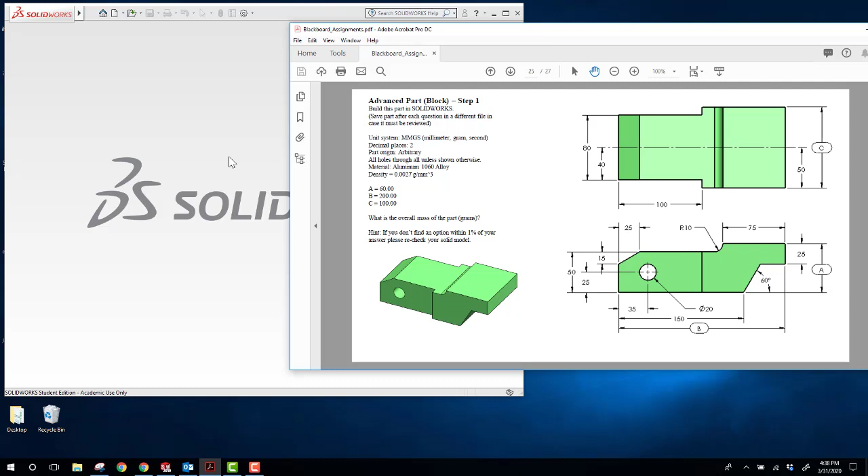The first thing I'm going to do is draw this profile. I need the values of A and B, which are going to be 60 and 200. There are a couple different ways of doing this. What I'm going to do is create a rectangle, and then I'll remove some of the material. We are in millimeters, so I'll create this in millimeters.

I'm going to create a sketch. If this is the view, this is the front view, and this is the top view. So I'm going to sketch on the front plane, and I'll go ahead and make a rectangle. So the B coordinate is 200. I'll come over here and get my Smart Dimension tool.

This will be 200. Now I would kind of put these in as actual equations, but if you look in the next two steps, these values don't change, so there's really no need for it.

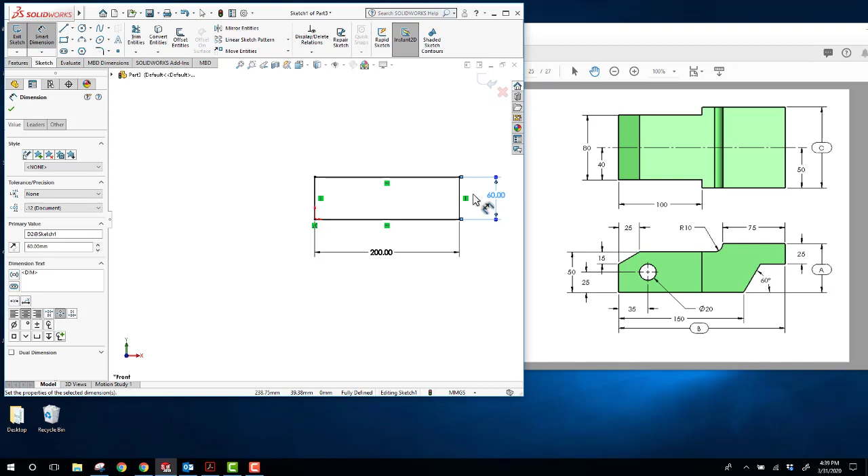Okay, so we have this little bit over here, so let's put this in with two lines. I'll come in here, come down, double click to end it, and get a dimension here of 60 degrees. And this dimension here should be 25. The distance from this point to the front of the part is 150. And that should lock that down.

Okay, so the next thing we need to do is this little bit out of here. The total height here is 50. So I'm going to not start at the midpoint, I'm just going to come up and create that little angle piece. I'll come over and go up, getting me the base shape. This distance here from this side to this is 25.

And this distance here is going to be 50. The distance here from this point to this point is going to be 15. And lastly, the distance from here to here will be 75.

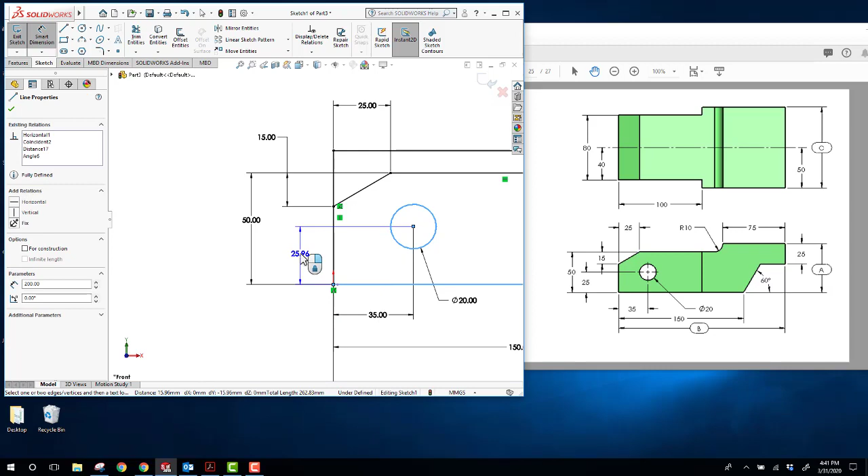So I'll come over here, zoom in a little bit, drop my circle, and the dimension is, the diameter of this is 20. I can click on the circle and the front line to give me the horizontal dimension, that is 35. And the dimension from the circle to the horizontal line here gives me a vertical distance of 25. The total extrusion distance is C, so that's 100.

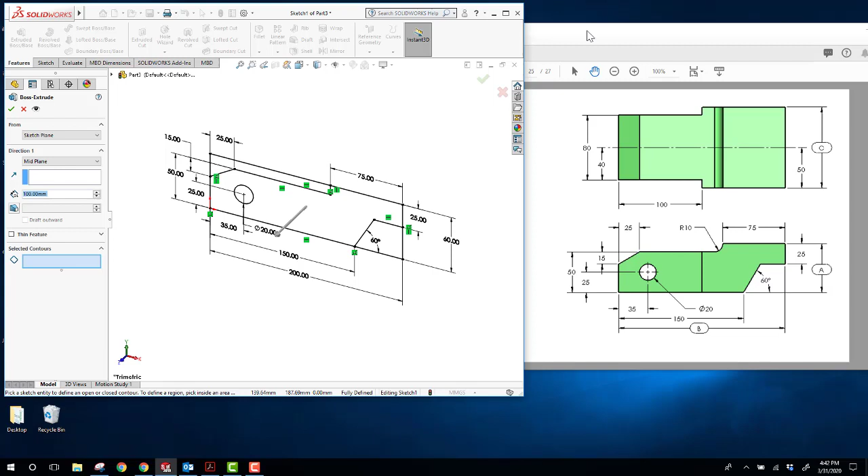So we'll go ahead and extrude this. We'll choose the Extrude button, Features, Extruded Boss. This part shows a mid-plane here, so it would make sense to do this as a mid-plane, so I'll do my extrusion as a mid-plane, and the thickness again is 100. I'll go back and double check that. It is, and now we need to select contours, so we'll come in here and select this internal contour, and we'll say that we're done.

So now we need to come in and put our radius in. We'll go Features, Fillet, using this edge. Oh, I didn't grab the fillet tool, so let's grab the fillet tool this time. And the radius is 10. The reason it showed up is I had that edge already pre-selected, and we'll accept that.

Now we have a little bit off the top here, so the total distance is 100. This is 80 being measured from the center line, so both of these are going to be 10 millimeter cutouts that are 100 millimeters long.

So what I'll do is go ahead and do a sketch on the top plane, and I'll just use my rectangle tool, and I'll do another rectangle on the top. Now I'll put some relations in here.

This relation, this side, and this line are going to be both collinear and equal to each other. And we'll accept that. Then this line and this line are both going up. I got a face instead, so let me clear those selections, and I'll select that line. Holding my control key down, I select this line, and these are also equal to each other.

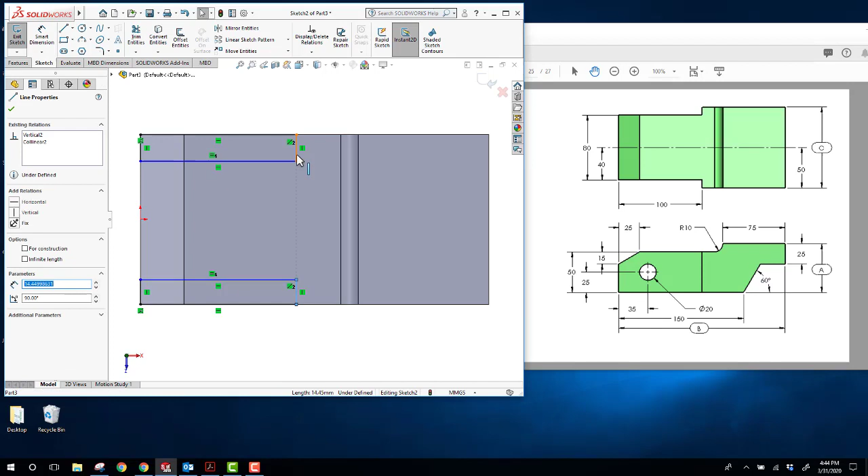Oh, I made that one parallel instead of equal. So let me delete that. Select it, I'll hit delete, and I'll go ahead and put this on, control key again, and make them equal to each other.

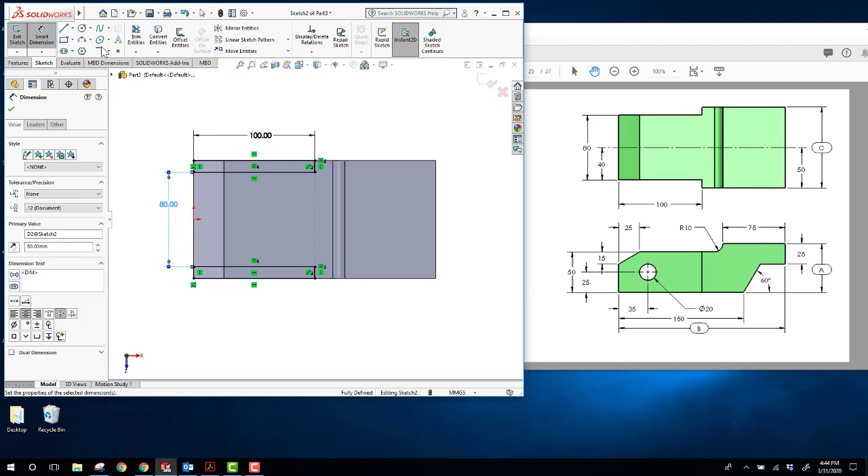All right, so now I just need to put dimensions on one of them. So this is 100. I could do this dimension if I don't want to measure anything, I can go from here to here and put the actual dimension they're calling out, which is 80.

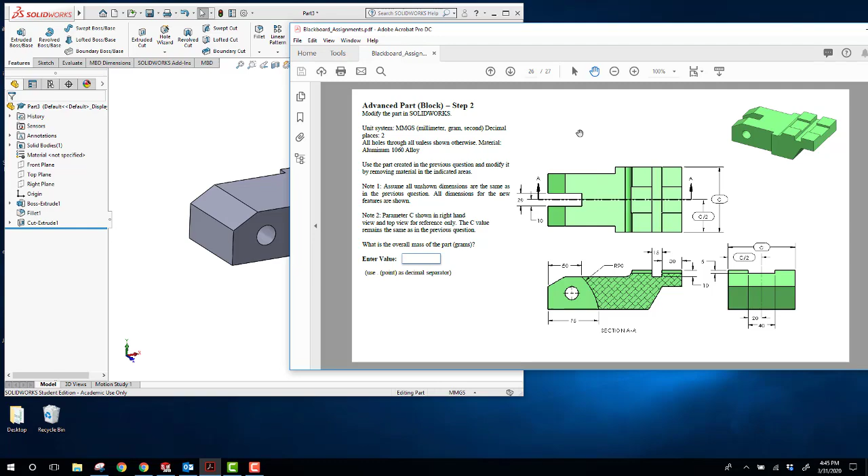This puts a couple of cutouts here. The cutouts on the top are pretty straightforward, but a lot of people are having issues with this one, so let's jump there first.

In this case, I'm going to make a sketch on the front plane. This is again why it was helpful to do that mid-plane extrusion. So I'll pre-select the front plane, and I'll say I'm going to do a sketch on that plane.

Now we see that we have a circle of radius 90, and they've given us the location of 2 points on that circle. So the location here is 50 and 75.

So I could create a whole circle, or I can just use the arc tool. So that's what I'll do. I'll do a 3-point arc, and I'll just select here, here, and then just drop the third point to define the radius somewhere. And we'll put the dimensions in.

So I'll use a smart dimension from the front to that point, and that becomes 50. And we'll go from here to here as well, and that'll be 75. And then since it's an arc, it'll ask me for the radius, so the radius is 90.

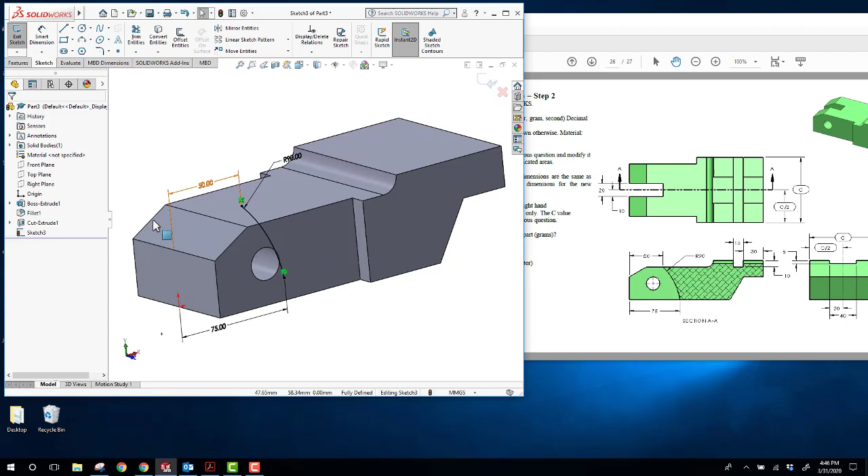And then to complete this, I need to actually get the rest of the area that we're going to use. So we'll just use the Convert Entities tool. Over here on the left, I'm going to click on normal to again, and I'm going to go Convert Entities, and I'll select this edge, this edge, this edge, and this edge again.

I'll say OK. And since these are converted entities, I can just go ahead and do my trim tool. So I'll use the trim tool and trim this one out and that one out. So we can look down that this sketch is fully defined, and I'll go ahead and do my extrusion.

So features and extruded cut. In this case, again, it's going to be an extruded cut from the midplane. Over here on the right, the total thickness there is 20. This 10 millimeter dimension is just telling you that this cut is centered. So my cut is 20 millimeters, and I'll say OK.

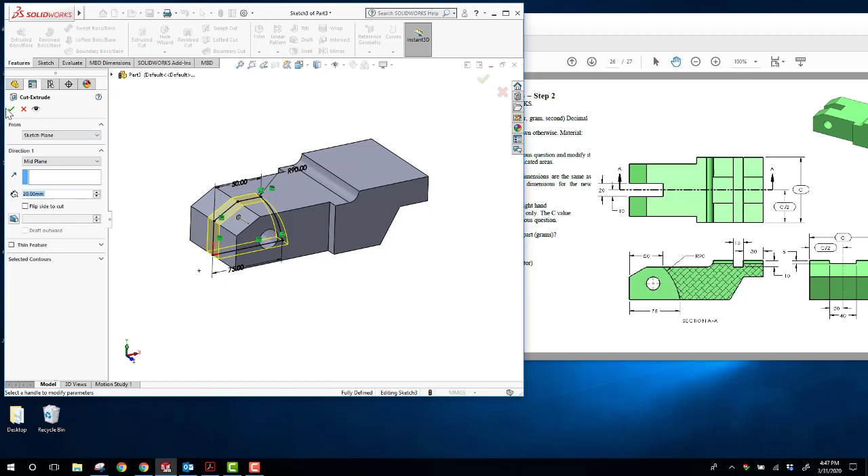So now we have the 2 cuts on the top. Really, the only best way to do this is through 2 different cuts. I can go ahead and create the initial shape and use it as an extrusion twice, but it's not really kind of neither here nor there. So let's continue, and I'm going to show you one thing that might be causing some of you some issues. I'm just remembering about it right now.

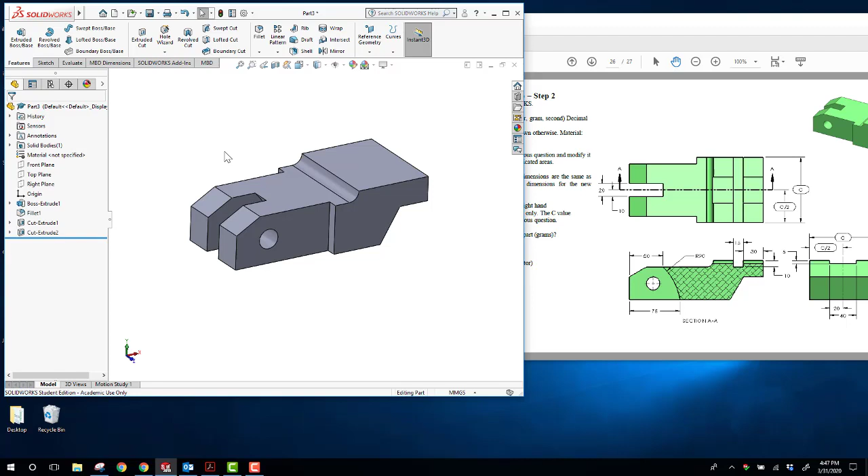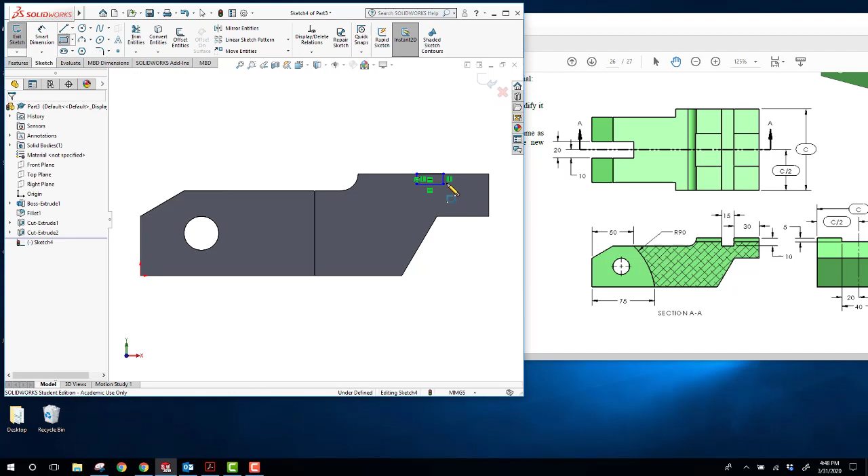So what I'm going to do is I'm going to do a sketch onto this face. Let me zoom in here. So we want to be 15, 30 over, and down a depth of 10. That's pretty straightforward. So I'll just come over here and I'll make a rectangle right here. And the overall depth, zooming in here a little bit, is 10.

The width of this slot is going to be 15. And the distance from the back edge is going to be 30. So with that fully defined, I can go ahead and cut that slot all the way through. So I'll do Features, Extruded Cut, and I'll go through all.

Now, what I'm going to do, or eventually do, is do the cut from the backside, this cut over here that I'm circling from the back. But if you should do this from the front, I'm going to show you an error that sometimes is hard to catch. So I'll do a sketch, and I'll sketch on the top plane.

And I'll go ahead and make this rectangle. And if I want to, I can put in a center line here from this point down to here, and I can do a symmetry constraint. So that allows me two solid lines and the center line, which will make my point symmetric.

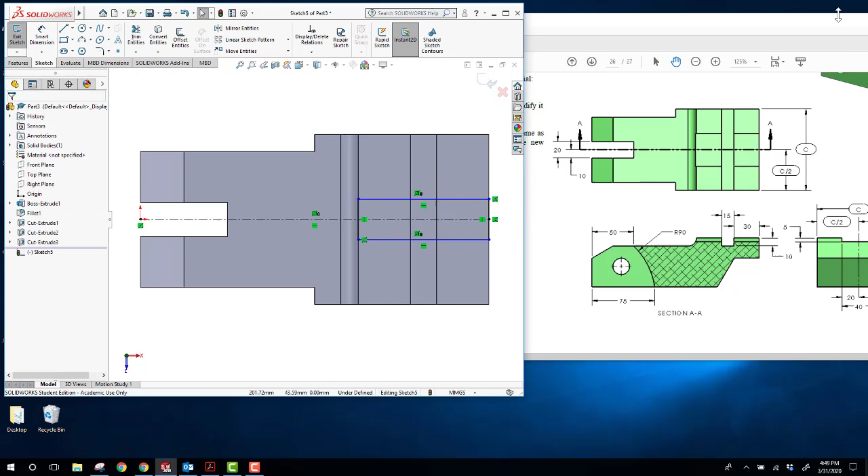And the distance I'm dealing with is 40. Again, this 20 is showing you that you're centered, and we're going to be down a depth of 5. So I'll go ahead and make this width 40. And I'll go ahead and do my extruded cut now, with my distance here going to be 5, so going down 5.

And everything looks okay, right? Except for the fact that look what happened over here. Because we did this fillet first, and this is the edge I went up to, the part doesn't go all the way through. So I'm left with this really, really thin piece here.

That is a problem that has happened to a few students over the years as they've gone ahead and made this part. So you could fix it now, but really the best way is I'm just going to come right here and delete this extrusion. Because yes, you can fix it, but it's really not the best way to have done it.

What we'll do is sketch on the back plane. So I'll go sketch. Now my center point is right here. Another way of doing that without having to put in the symmetry constraint is I can just use a center rectangle tool. Now when you do that, it doesn't automatically put the center of the rectangle above the origin, so you have to again put in a relation, in this case a make vertical relation. This dimension again will be 40.

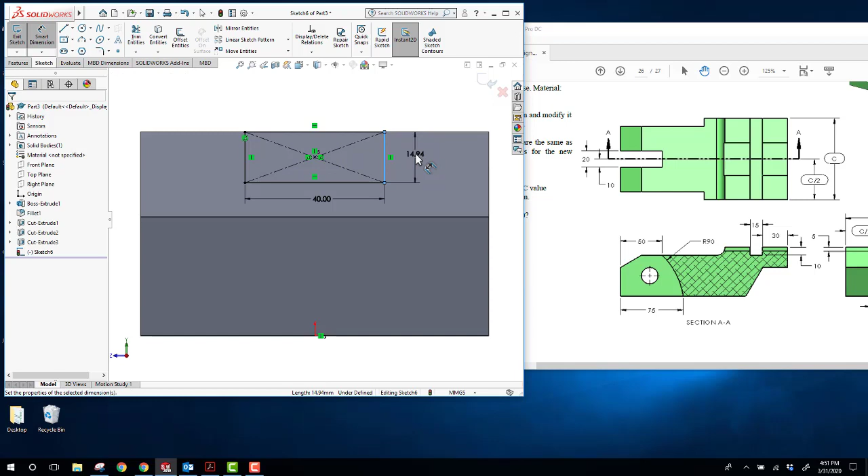And the depth here will be 5. And then with this fully defined sketch, we'll go ahead and just do an extruded cut through all.

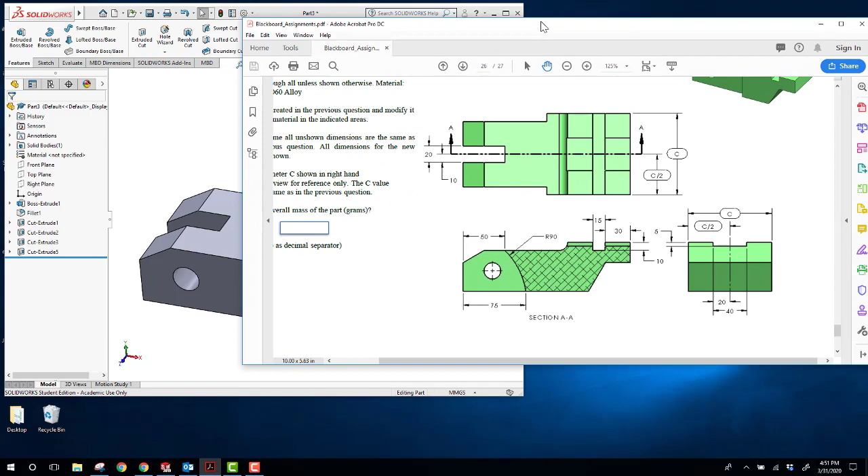Okay, so now with this part done, this is all that was required for part 2. So now we go over to the third step, and this sometimes causes students some problems because they're looking at this and trying to say, should there be some type of shell going on here or anything along those lines? And the answer is really no.

There's no easy way to use a shell here because they're just asking you to make the wall all the way around. This is what TYP stands for, typical. So the wall thickness of this little shelled area is going to be 2 millimeters, but you can't really use the shell tool. You're going to have to create this using 2 cuts.

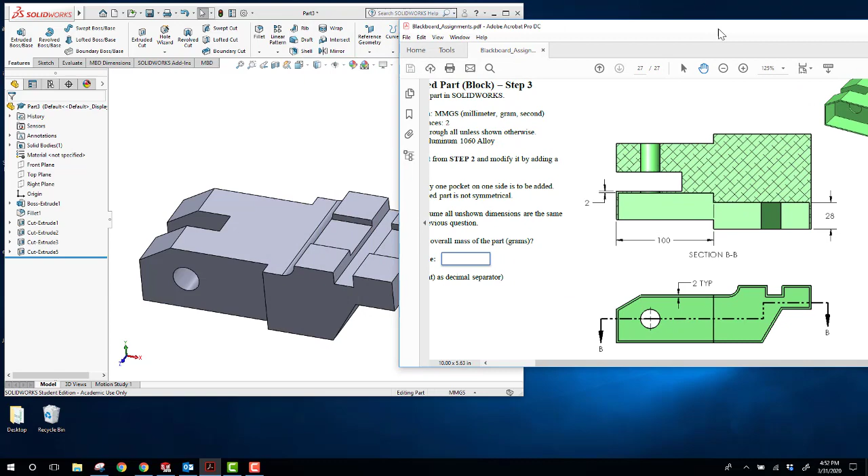So let me explain what we're going to do here. I'm going to do a sketch onto this plane, right? And that's going to be this area. So I'm going to use the offset tool. From this, I'm going to offset entities. My distance, my parameter, will be 2, and I'll just start with this line.

Now it's gone out the opposite way, so I'll click reverse here. Usually it lets you go ahead and select your set of lines. Sometimes it'll fail and you'll have to do this in 2 operations, but it's looking like it's going to be nice to me today. And this one, and also the curve, and finally that one. And that's it, so I'll say done.

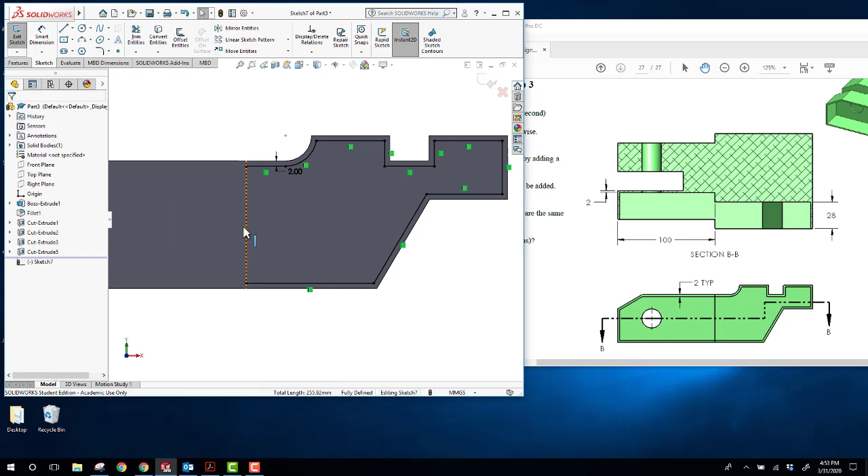And you'll say, well, why didn't I use this part? Because this part isn't going to be shelled, right? This is this edge here, and I'm going to want to take all that material out to a depth of 28 millimeters. So I'll go ahead and finish this with just a straight line.

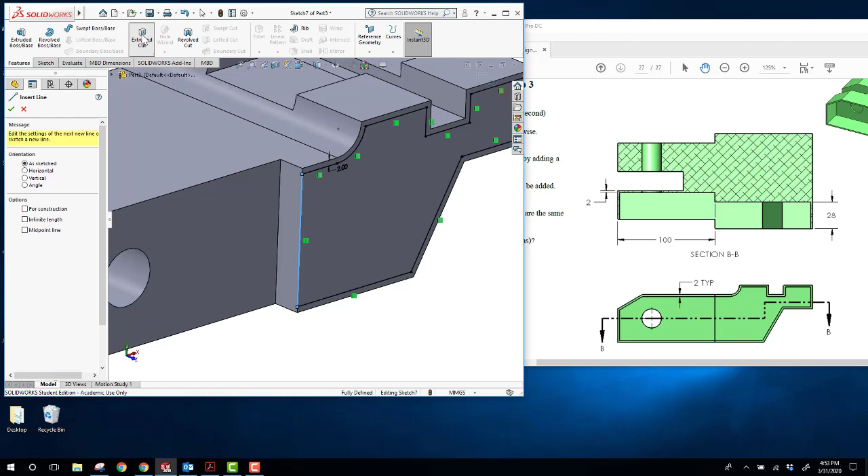And complete my sketch. I'll go to Features and Extruded Cut. And my depth now will be 28 millimeters. And I'll say OK.

All right, so now we'll do the exact same thing, but here. And the depth here is also 28 millimeters. So I'll come over here to my sketch tool, select sketch again, and this time I'm going to sketch on this face. And we're going to essentially do the exact same thing.

We're going to do offset entities. Selecting this one, we have to reverse it, and selecting this edge and this. Oh, excuse me, what I did there is I missed this click when I did it, and the tool just exited, which is okay. I'm just going to go back into offset entities.

It'll remember that I'm at 2 millimeters, so I'll just come in here and select. Now I will have to come back here and trim that, because it won't do it for me automatically, and this last one. And then to complete my sketch, or to close it off, I again have to put in a single line here and here.

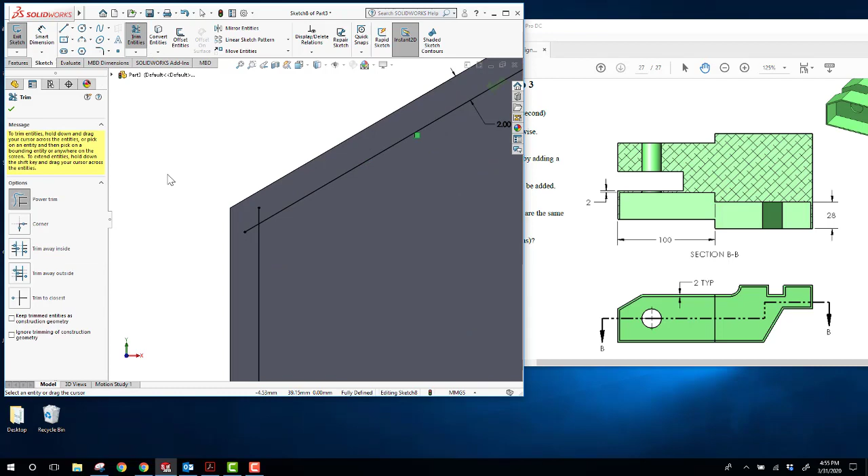Now I'm just going to come in here. I really don't want these two being off, so I'll go ahead and use my trim tool to trim off those two. And again, whenever you use the trim tool, you have to make sure that your part or your sketch remains fully defined.

So in this case now, I'll go Features and Extruded Cut, and again, 28 millimeters. So the 28 millimeters was already selected. And now hold on, this is 28 millimeters. I'm not sure if this is 28 millimeters.

This wall thickness here needs to be 2. So let's assume it's 28 millimeters. I didn't do my math. We'll come back and just double check. So I'm going to evaluate, measure, and I'm going to measure the distance from this surface to that surface. And the distance is 2 millimeters.

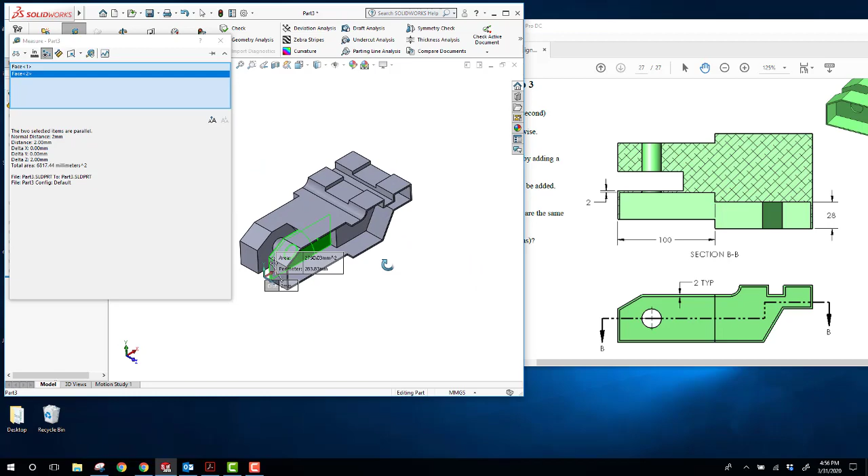So sometimes don't get too ahead of yourself, or as Han Solo says, don't get cocky, kid. So you want to just double check that you are actually doing what the part wants you to do. All right, so that is how this part gets created. I'm not going to give you the answers. You'll have to go back and redo it yourself. But hopefully this has been helpful for you.